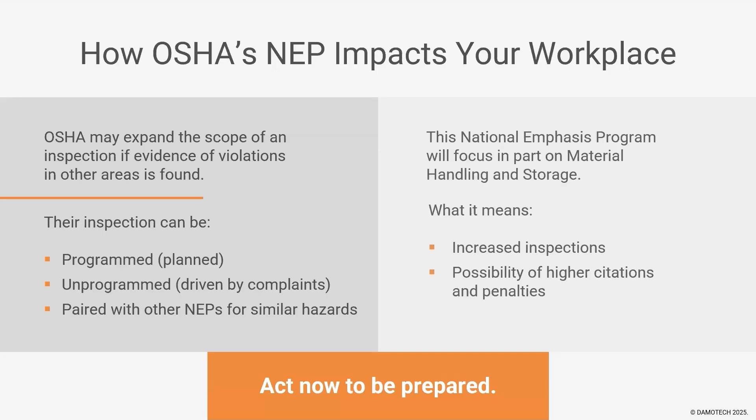Going back to the means of egress example, they would be able to take a look at your racking and look out for things that might not be in keeping with code, whether that's a lack of load capacities or damage to the racking, things we'll cover throughout today's presentation. The idea being we should look to act now and be prepared, because it's just a matter of time when OSHA is going to have to show up at one of our facilities.

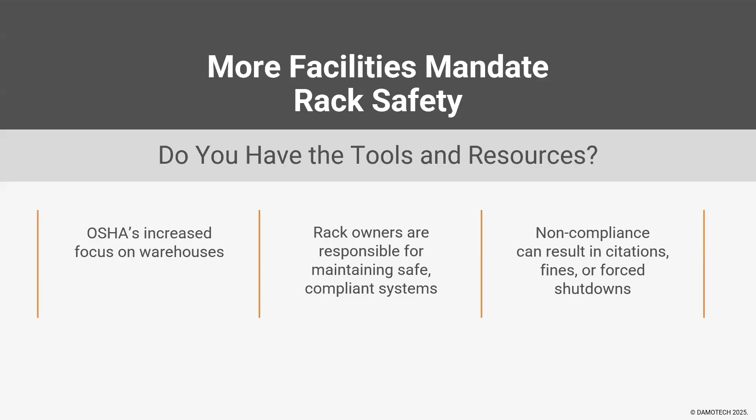So more and more facilities are mandating rack safety. In many instances, it's not just OSHA that's being the forcing function throughout the organization or the network. We want to make sure that as we make our way through this, you have the tools and resources to navigate through what those OSHA demands could be, and to the extent you have corporate policies or other forcing functions within your organizations that require an emphasis on racking, we'll make sure you're compliant so that you avoid not meeting your own guidelines, or that you're well prepared for the eventual OSHA visit.

So why does rack safety matter? Well, we're looking to protect employees, we're looking to protect the inventory and our operations. That's the fundamentals behind it. And there are real costs associated with rack safety. To the extent the racking is put out of service, there's downtime, there are certainly potential fines that could be levied, and there could be injuries or reputation damage if something really bad were to happen to the rack and cause injury or even potentially death.

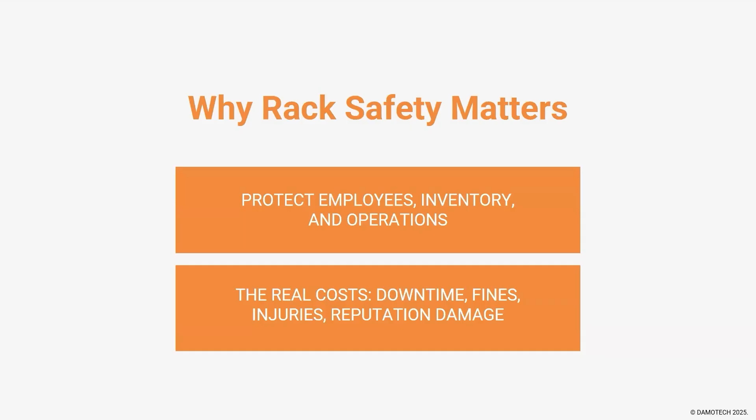So the five must-dos to reinforce warehouse safety. Let's kick things off with the first one.

Scheduling regular inspections. This is an important one, and it's one that we always lead off with, because having an inspection, whether self-performed or done by a third-party expert, gives you a baseline and a full understanding of what's going on with your racking.

Racks are highly efficient structures, components designed by engineers with decades in the industry, predominantly meant to support vertical loads. So to the extent a racking manufacturer can use 10 to 15% less steel yet still support the same weight, that's good for them, and good for you too, since everything is priced per pound and you'll pay less for that racking.

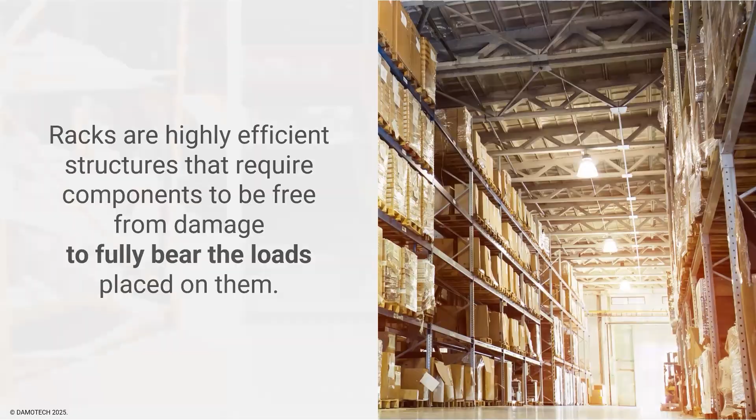The reason we're concerned about these kinds of damages is that if we don't act on those issues, we end up with what we see on the screen now. We don't put these up to scare folks, but when I present these webinars or in person to customers, there's inevitably a gasp looking at these images, because this is what happens if racking damage is ignored or if we're complacent about addressing the issues that could be present within the racking in the warehouse.

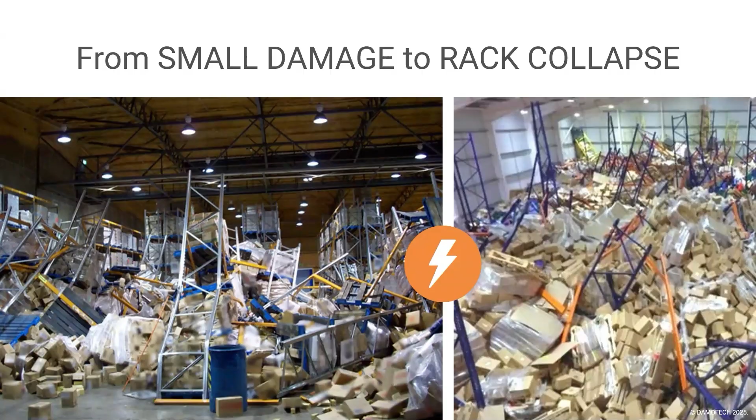So rack damage - I showed a couple examples there. Is a collapse imminent? How do we know if the damage our racking has sustained will lead to a collapse? We just don't know. We have enough experience to know the damage is significant, but I can't tell you whether after 10 years the racking will let go the next day, a week later, or two months later. It's awfully difficult to ascertain that.

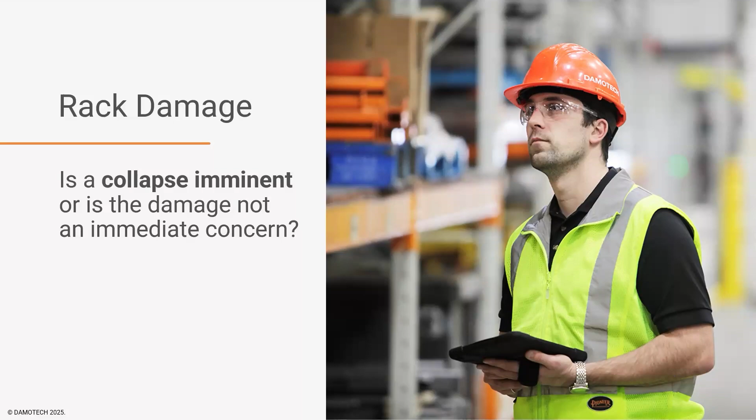That's why we take the conservative approach of saying no rack damage is good, and we should get ahead of it before something does happen.

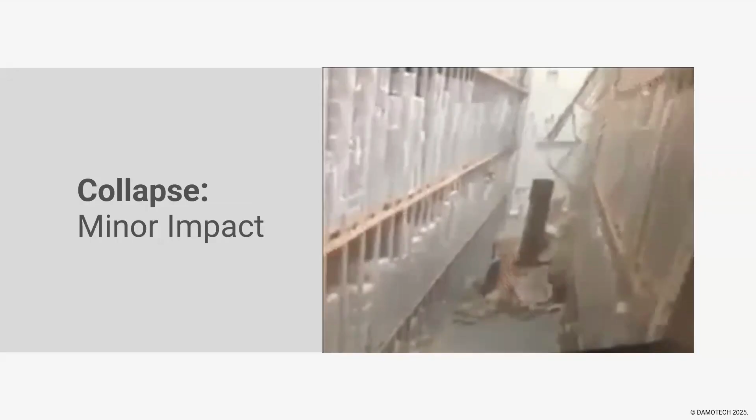And sometimes it doesn't have to be a big impact. Here's an instance where a minor impact barely brushed up against the upright, and because the upright had already sustained damage and was already weakened, that small tap of the forklift was enough to cause it all to come toppling down.

We're going to back-to-back situations with row spacers, we're doing top ties - all of that leads to the racking coming down section by section.

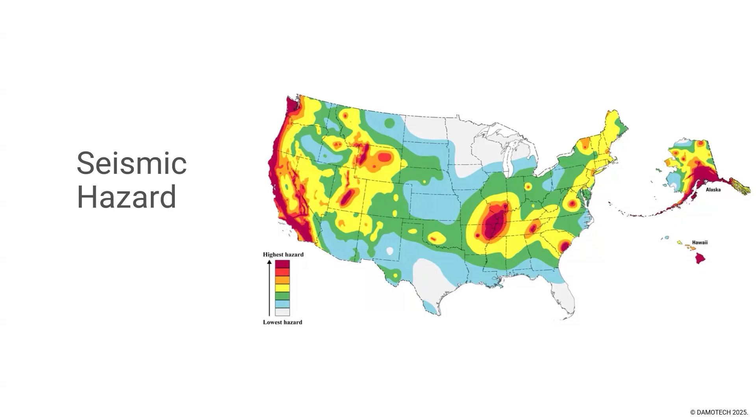So, kind of food for thought. We've inspected over the years, and this data is about 12 years old.

We've inspected north of 1 billion square feet of warehouse space, and in our experience, most warehouses will have 10% of their racking bays have some form of high priority issue, and up to half of these must be unloaded immediately. That's from data we've collected inspecting warehouses more than 3 years old, in some cases more than 20 years old, that have never been looked after. So if it's been a couple decades since someone has put eyeballs on the racking, most definitely you will have more than 10% of your racking have some form of high priority issue that should be looked after.

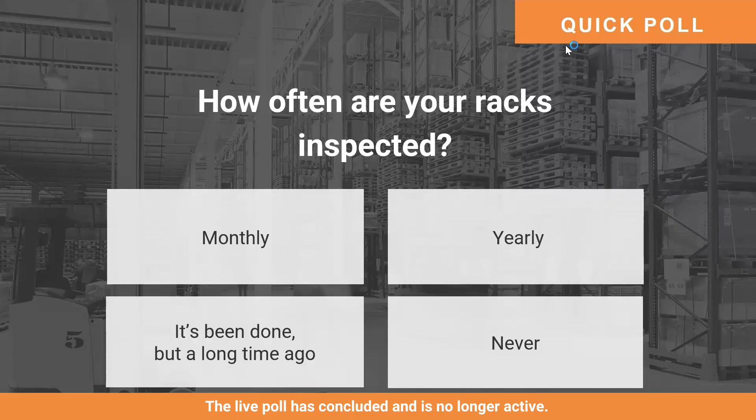So how often should racking be inspected? There's four choices: monthly, yearly, it's been done but a long time ago, and never. I'm going to launch a quick poll, and I'll ask everybody to take a few seconds to answer, and we'll talk about the results.

Again, how often should racks be inspected? So 76% of you answered that the rack should be inspected monthly, 15% of you said yearly, 9% of you said it's been done but a long time ago, and of course, good news, 0% of the attendees said never. So that was really great. Thank you for that.

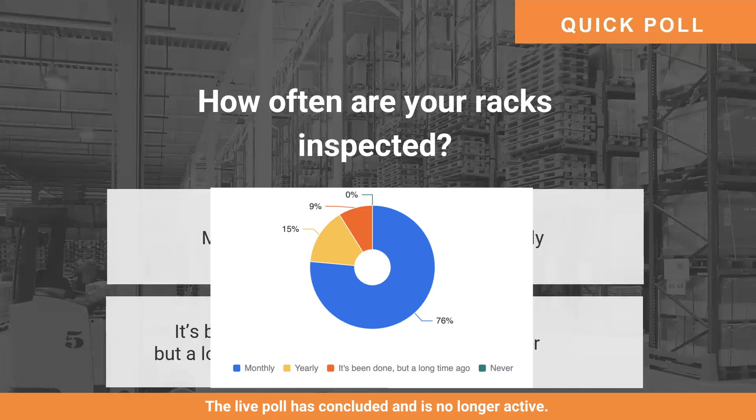Now, as we keep going, the answer to this is 'it depends,' which our chief engineer is very fond of saying when we ask him a question about engineering around racking. He says, 'What do you think, Charles?' I'll often answer with 'it depends,' and I would tell you that the frequency and who should be inspecting your rack will depend on the type of environment that you're working in.

Annual inspections are strongly encouraged by the industry. There's no code that'll stipulate the frequency, but there's always a general nudge towards saying you should have somebody with expertise, a third party, hopefully an engineering firm, that can come in and take a look at the racking on an annual basis just to make sure all the small things have been looked after.

Monthly inspections, and this is very common with many of the national accounts that we serve today. Those monthly inspections are being done by their own trained warehouse employees, or folks that maybe have gone through a Damotech training situation, or have been trained otherwise. But a monthly inspection by somebody at the facility level would be a great idea.

Weekly, certainly there's some areas of the warehouse which are more prone to damage. For example, your shipping and receiving areas where there's a lot of traffic and velocity going through, those might want to have a more frequent inspection. And there may be some areas like ends of aisles or certain freezer departments where you'll want a daily inspection. Maybe you have 50 or 100 bays of racking that you could quickly view to make sure there wasn't any significant impact that hadn't already been reported.

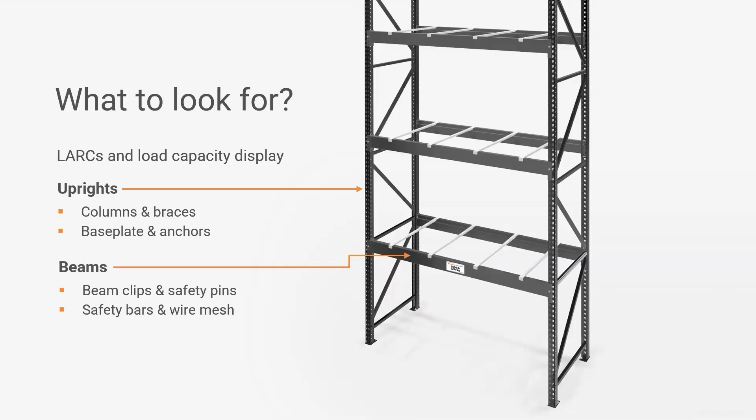Now, when to inspect. Here are five, I would say very common situations when we'll want to have somebody come in to inspect.

If there's incomplete documentation, if you don't have load capacity and LARCs for your racking—a load application and rack configuration drawing—you're required by the building code to have it. So that's a good time to call in an expert to assess what those capacities could be.

If you reconfigured the racking, if you've had a new installation of racking, maybe racking left over from another site that you're now going to add and expand for an existing warehouse, you'll want to have that inspected to make sure it's in keeping with what the code requires.

If there's been an accident, clearly, if you went through one of those situations we showed on the video, you'll want to have somebody come in.

And maybe you've been through a seismic event. We've been called upon more times than I can count after even a small seismic event in California to come in and put our eyes on the racking, to make sure the welds held, that the racking is still plumb, that it behaved the way it was supposed to throughout that seismic event. So if one of those takes place, you'll want an expert to come take a look.

Clearly, if you've had the unfortunate luck to have OSHA come in, you'll want to bring in an expert to partner with you to make sure you have what's needed to answer OSHA, put a plan together, and address the concerns they may have already highlighted.

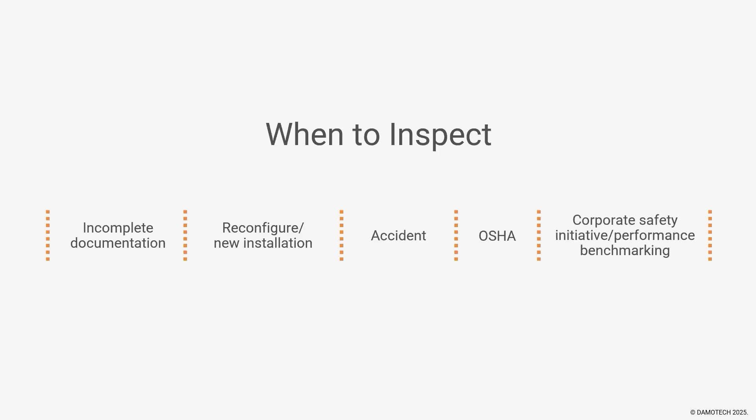We've talked about inspections quite a bit, and I think it goes without saying that inspection from the get-go, especially an annual one, is meant to be independent. It's meant to have somebody with no other desire but to impart their expert knowledge to ensure you're meeting code. So it's often called a third-party audit.

It's really meant to see if the racking, as it sits and stands there today, is conforming to the codes and standards. We happen to have trained engineers perform the inspections that we do, so we'd advise that's a recommended thing, but of course there are plenty of companies out there with trusted professionals that I'm sure can do a great job.

We happen to think that if you're going to bring an expert in once a year, it should be somebody with a lot of deep knowledge on the engineering of the rack, so they can address the issues they might find and keep the context of the situation in mind. Of course, you'll want a detailed report, with key findings and recommendations.

So the inspections that we do, or that a professional should be doing, involve a multitude of different elements. I think we do something like north of 45 or 50 different items as part of our overall checklist. So as we make our way through the slide, starting in the top left, we'll certainly look at damage to the upright.

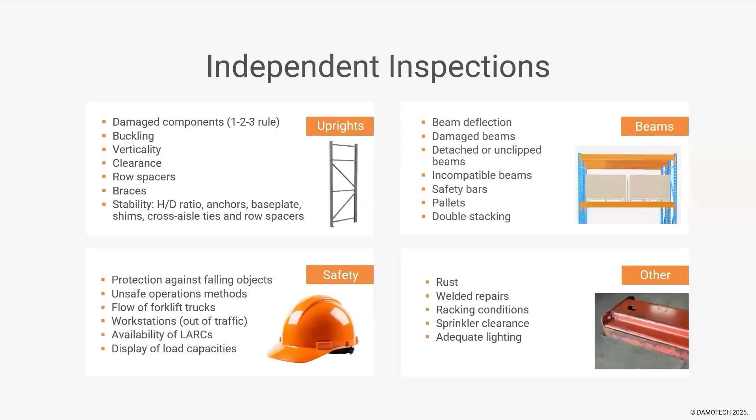And look, it just goes without saying, when you apply a significant amount of heat to a piece of metal, you're changing the metal components of it, the properties of the metal, so it will behave differently. So we would strongly advise to avoid performing welded repairs on your racking.

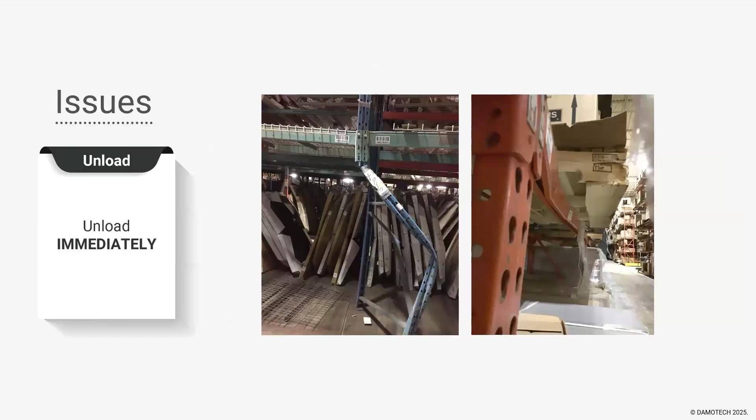So here's some examples of some unloads. I think no one's going to argue that these pictures should cause folks to be concerned. So you have a damage like the one in the first picture there, that blew upright - that is just crazy. And what's not obvious is that in many of these situations, these locations are still in service. In other words, they still have freight or pallets loaded on them, and that's not a good thing. These have to be cordoned off. You put safety tape on these things to make sure that no one is using these locations.

And the same with the next picture, that beam that was severely impacted. It's putting stress on the connectors. So you have a full pallet sitting there on top of it. Even though it's just a few feet off the ground, not a good thing. You don't want components damaged like that supporting any kind of weight whatsoever.

High, so these are instances where the welds were simply not in keeping with what we would expect as a standard. So these are areas where the areas were not prepped accordingly. The welds are clearly a little bit botched. This is where we would want to ensure these components are addressed right away.

If you look to the pictures on the right, you have a pinched column, that's just from people loading in the freight. And at some point, these cold formed or roll formed uprights, the gauge is so thin that you barely look at it and it gets deformed. So we're seeing some of that there.

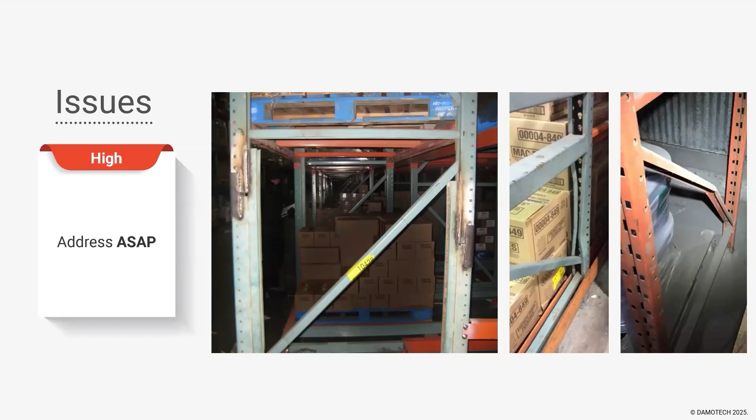Moderate: just some small, moderate deformations to the side of the upright. Maybe we're missing some anchors like in the middle picture, or missing a safety pin. Safety pins are required by code.

They're a good redundancy to ensure that should somebody operating a pallet or forklift inadvertently lift the pallet too high, which could cause the beam to dislodge, we want the safety pin to allow for that to catch and not allow for that beam to dislodge itself.

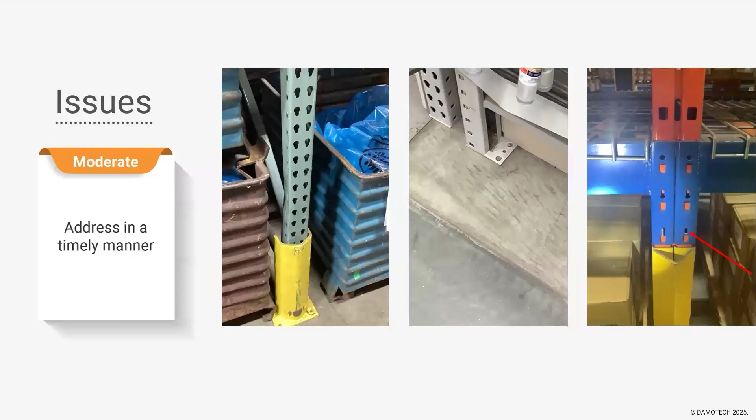What's also good to note is that several low or moderate issues can add up to something that's high. And only a trained professional will be able to tell you whether those issues are significant enough. Is there a slight twist to the upright? Is there a minor deformation to the brace? All those things, it's almost like paper cuts. After a certain amount of time, you add all these things up and they're weakening the overall system. A trained professional will be able to tell you whether those should be of concern or not.

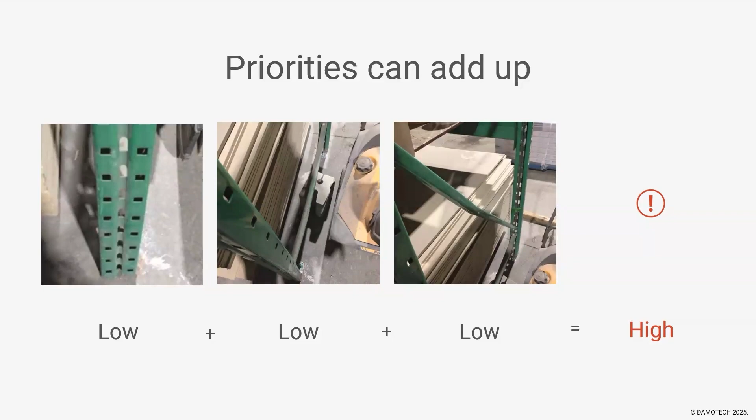Looking at upright columns, damage to braces, anything obvious going on with the beams. Are your uprights anchored in accordance with what the load capacity documentation says? Because in some cases your rack design may only call for one anchor and you're good to go, but you could be in a seismic environment where a minimum of 2 anchors is required, or 4 anchors is required. Whatever those engineering documents say is what you should be following.

Are there beam connectors in good condition? Are they still well seated? Are there any local repairs, the welded stuff that I showed you earlier? Do you have placards or labels for your load capacities? Is your racking plumb or not? Take a bubble level or torpedo level to see whether the racking is plumb in accordance with what the allowable standards are, and then start rating these.

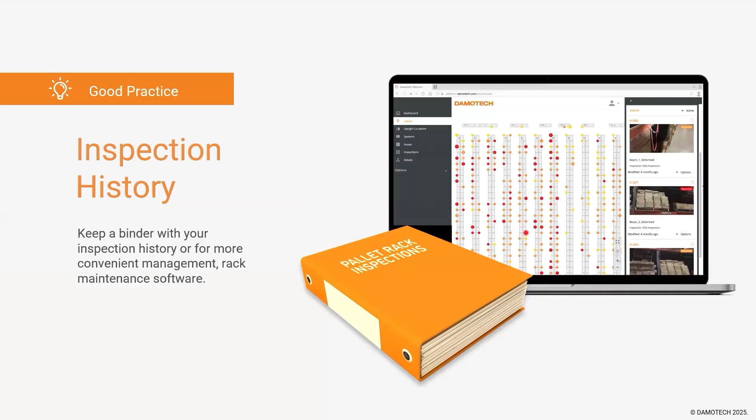In terms of next steps, make sure the experts you work with help you identify high priority issues, that you understand the level of risk, that recommendations come from experts, and that you avoid unnecessary downtime from having positions put out of service.

Must-do number two: take charge of safety with a solid action plan. Now that you've hired an expert to come in once a year, or maybe you're performing your own self-assessments monthly or more frequently, make sure whatever product or deliverable you get allows you to understand the critical things to go after. Not everybody has unlimited funds, so you'll want to spend those wisely but be timely in how you address the issues reported back to you.

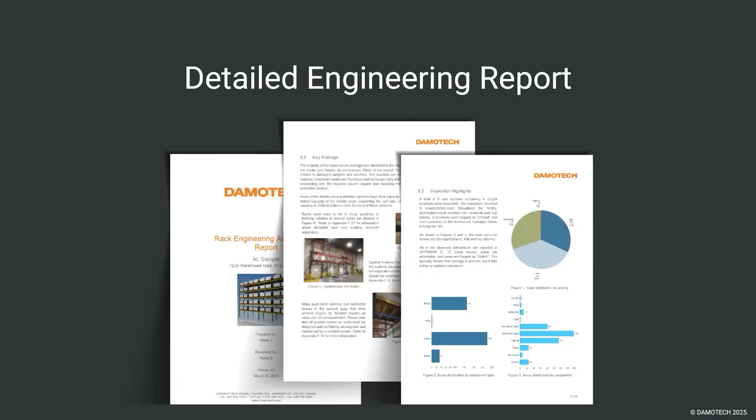As part of those findings, you'll want something very detailed. It should be stamped. Maybe you have Excel files that let you see the images that were loaded, or maybe, like us, you have an interactive layout built out for each inspection, accessible through a web-based platform.

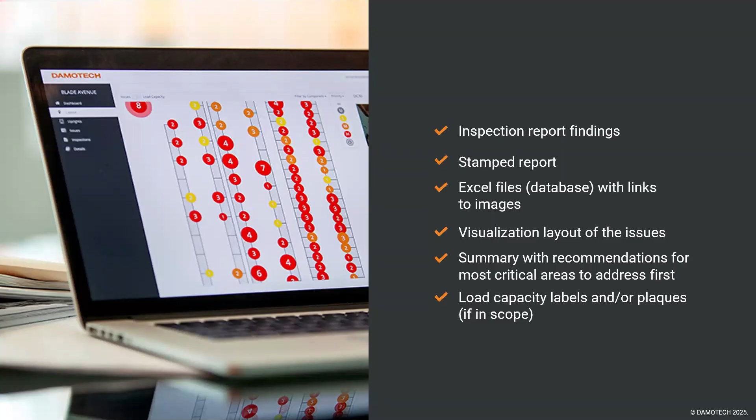That expert should be able to whittle down the vital few things you want to focus on first, to ensure critical areas are taken care of. And to the extent load capacity was part of the scope, you'll want to ensure you get that information as well.

We talked about priorities. At a very minimum, you should want to ensure you understand what to focus on, so all your issues should be prioritized so you can focus right away on the things that matter most.

We also want to be mindful that rack damage equates to unusable bays. If you're a big box store, or you have multiple DCs servicing the food and beverage industry, rack damage can be very significant.

If you're a 3PL renting out space to customer XYZ who's paying to store goods at your facility, and you've got 10% of your locations out of service, that's money that's just not flowing to you. All of this leads to not only unsafe conditions but a potential hit to the bottom line, so you'll want to develop a plan to fix critical issues ASAP.

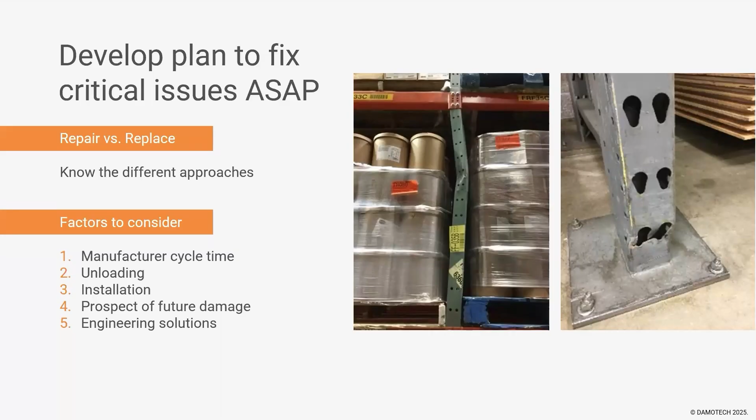Consider engineered solutions as well. If you're going to replace damaged components, they've got to be like-for-like.

If you've got bolted racking like we see in the picture, the blue racking there, you'll want to make sure that you're replacing those components like for like. Same gauge, same height, same dimensions, same everything. Not because you damaged a 96-inch beam that you could just take a 96-inch beam from your stock and slap it in. It's got to have the same gauge of steel, the same profile, height, depth, because they're just not going to behave the same way.

It's happened before where customers of ours, one in particular in the retail environment, having several retail stores throughout the US, they had a presence in Mexico and they repatriated a bunch of those uprights after those Mexican stores were closed. They thought the racking was the same. It looked to be the same, had the same dimensions, the same color, the same hole punch, only to realize that the racking's gauge was 30% less than what it was supposed to be.

So they started loading up those uprights with the same amount of weight, and lo and behold, one day, in the dead of night, the rack collapsed. It did that little S curve in the upright, and they wouldn't have known otherwise, but they thought they were safe with an upright that seemed to be the same, and it just wasn't.

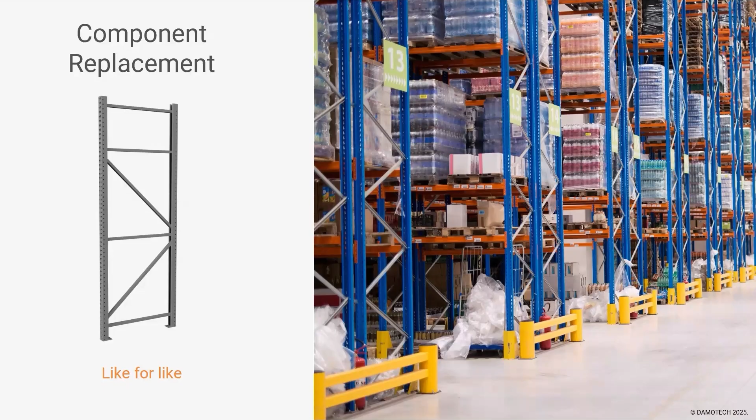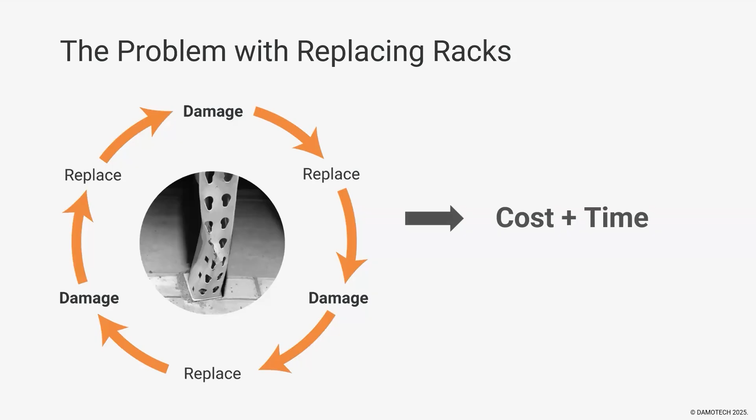So we want to make sure that we're like for like in every instance. I'm not saying that every component can be repaired, but think about it: once you damage an upright and you replace it because you're doing the right thing, it's just a matter of time before that same upright gets re-damaged again, and you're just going through this cycle over and over again, which costs time and costs money to perform this inevitable cycle that we're in when we start replacing damaged uprights time and time again.

Column repair, rack repair, as it's commonly known, is an interesting alternative, but you want to make sure that it does what it's supposed to: that you pick the right vendor that has an engineered solution that restores the load capacity of the location you're repairing, that it maintains the original configuration, that it's bolted as opposed to field welded or some other form of field prep, and of course that it minimizes the impact to operation. These are all things you should keep in mind as you pick a potential vendor to perform rack repair at your site.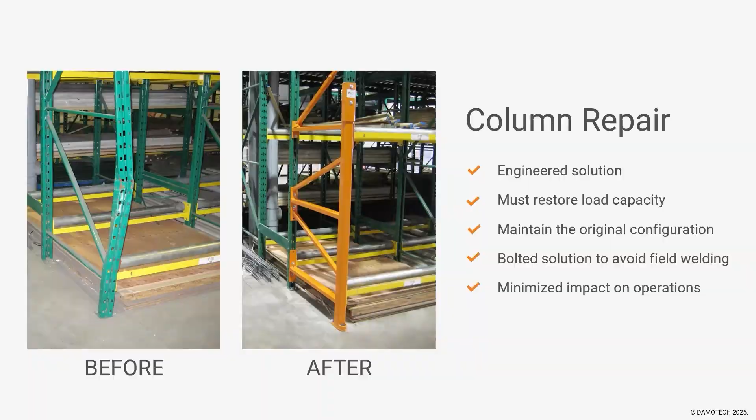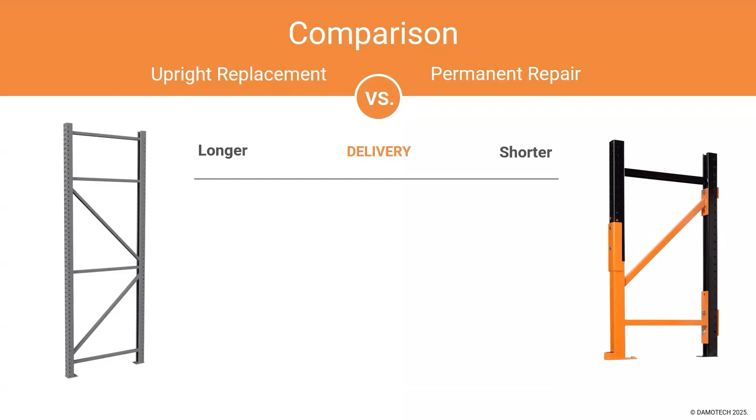A quick comparison between replacing an upright and repairing it with an engineered solution: on the rack repair side, at least at Damotech, you're in that 4-week time frame, and sometimes less, in terms of manufacturing cycle time. Compare that to an upright replacement—unless you have those in stock, or unless the OEM happens to have those in their yard, you're going to be several times multiple longer for the delivery of that.

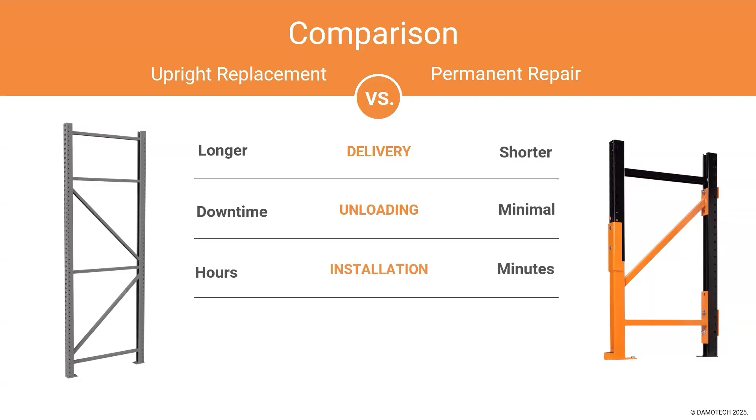Think about the situation I showed you a couple of slides ago, where you've got 5 beam levels. The amount of time to remove the freight, to unclip all the beams, swap out the upright, versus, if it's done the right way with the right engineered solution, you'll have a minimal unloading required for rack repair. Installation-wise, it's hours to swap out an upright, but it's minutes when it comes to rack repair. A 24-inch kit, which is the one you see on the far right side of the slide, takes anywhere between 20 to 30 minutes to repair. So think about how that impacts your operations and the pros and cons of both.

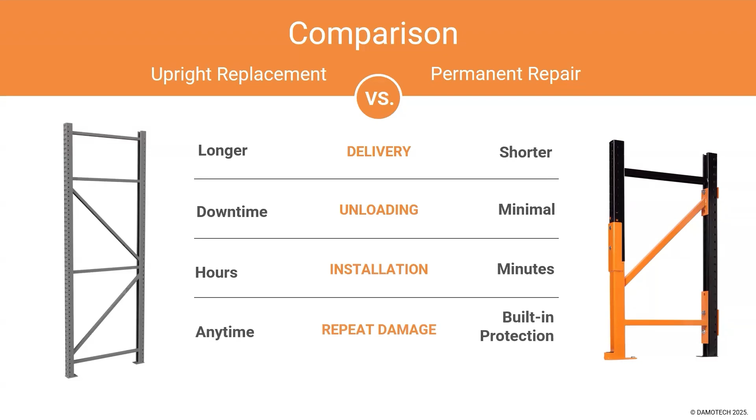And then finally, on the rack repair side, especially with the Pro line, which is the orange kit you see there, it has built-in protection—it's guaranteed for life against impact. Coming back to what I showed at the very beginning of the presentation, uprights are just not meant to be impacted. So it's a matter of time before those uprights get re-impacted and we get into that awful cycle we were talking about.

Now, if you had a competent inspector come in and perform an assessment for you, they'll want to talk about protection solutions, not from a vendor standpoint, but just from an overall perspective, saying, hey, by the way, we noticed a trend that certain parts of your systems were getting impacted on a frequent basis.

Maybe it was the ends of aisles, maybe it's certain tighter aisles, whatever the case may be, you'll want to ensure that you are made aware of the solutions that might be available to protect people, infrastructure, assets, and inventory. So protecting people, this has nothing to do with racking per se, at least on the first slide. If you have pedestrian traffic and walkways with heavy lifting equipment navigating close to these things, you'll want to make sure you protect folks so they're not at risk of being hurt by operating equipment.

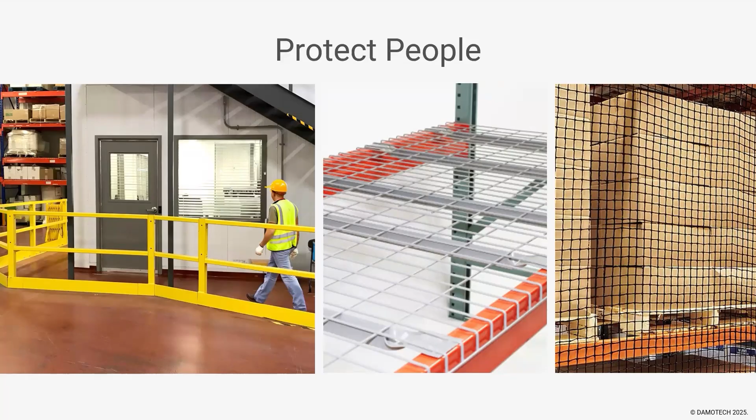If you're in a tunnel and you don't have wire mesh decking over the beams there, you won't want product to fall on people either walking under the tunnel or navigating through with equipment. So make sure you do put decking in the tunnel areas. And as I mentioned a few slides ago, if you have a section of racking where on one side you have pedestrian traffic, you'll want to put netting to make sure the product doesn't inadvertently fall and hurt somebody.

Again, not having a good day - that has to be assessed, has to be fixed, and then has to be signed off by a PE. So we're talking tens of thousands of dollars to effect a repair on something like that. Whereas you could have spent a few hundred, maybe $1,000 on the right protector and the right protection solution, and you wouldn't have to face that.

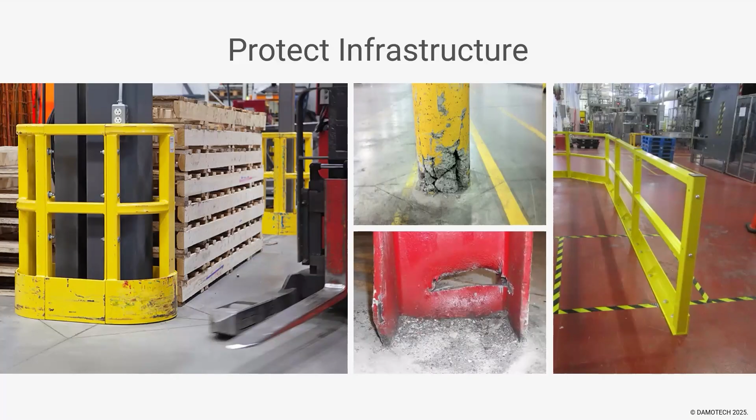Then, of course, if you have other infrastructure like machinery, you'll want to protect that as well, because millions of dollars go into some of these machines, whether it's bottling or other food service machinery. Those have to be protected adequately.

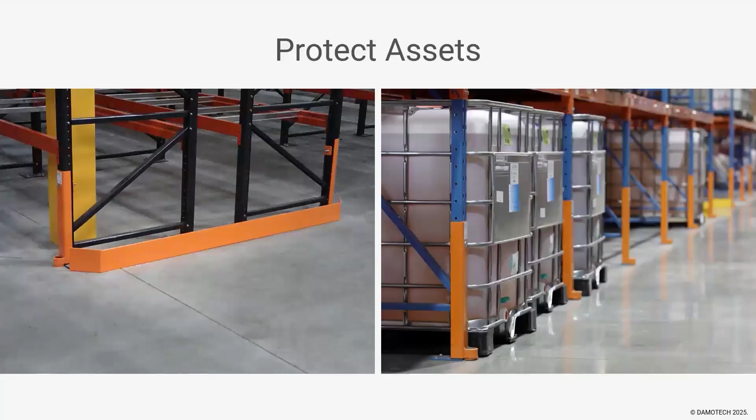And I would say, racking is an asset. It is not just a commodity. The sooner we start thinking about racking as being an asset that supports things that then get distributed, the sooner we'll start treating it like an asset and protecting it accordingly.

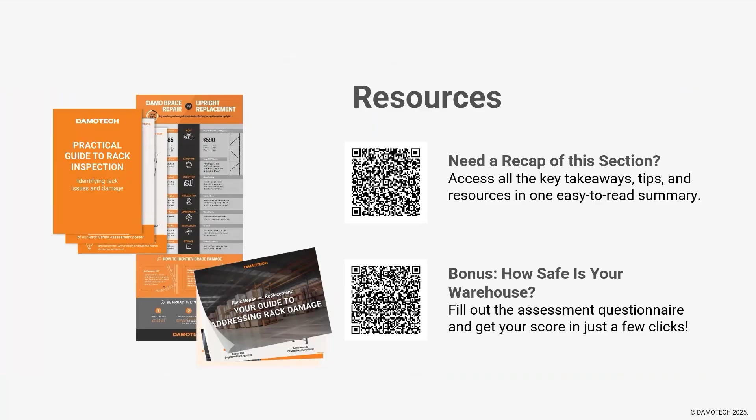So some resources that you're happy to QR code if you're looking to understand the practical guides to inspections and the like. These are things that you'll want to look at readily, and obviously we have tons of content on our website. So we're down to must-do number 3, which to me is one of the more important ones.

After you've taken a look at all the information from the inspection report and you have a list of issues that have been prioritized and you understand what to go after, how do you ensure that it's actually taking place? How do you ensure that you're really addressing these issues over time? The last thing you want is to have somebody come in on February 1st of a given year, and then fast forward 6 months and those issues are still present. So you'll want to ensure there's accountability and a way to monitor that progress.

Again, not to tout Damotech, but as part of our inspection and load capacity offering, we have a web-based portal where you could navigate through the issues that we find and be able to address those real time and check those off as the weeks and months progress.

So our dashboard, again, it's real time. It shows you the state of affairs with your racking, kind of a health check. It provides a heat map analysis of all the issues that were there, all color coded to ensure that it is very clear to those in charge and those acting on some of these issues what the priorities should be.

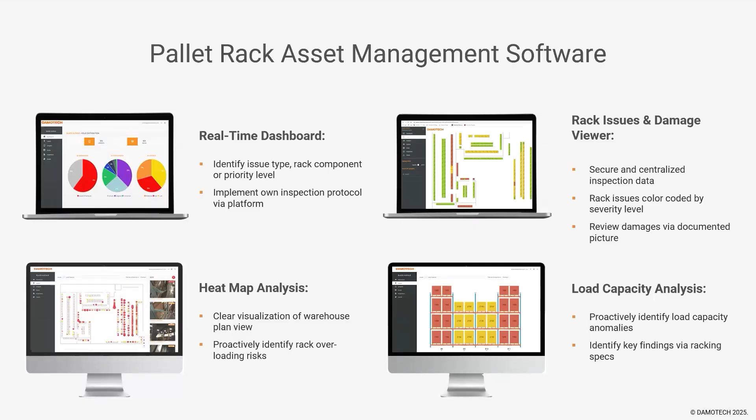And of course, for load capacity it's the same way. As part of our assessment, if we see load capacity levels that are under what we think they should be, we'll highlight those, so you'll be able to have a look and understand why there may be a concern with load capacities.

So as you track and report, what are you trying to track? Well, of course, making sure that you're staying on top of your load capacity. To the extent you've made a change to the beam levels, you'll want to ensure that you have a professional reassess that particular upright to make sure it's done correctly. Inspection reports, that those are logged, that all the issues, if there are modifications or repairs, that those are addressed and you're keeping track of those.

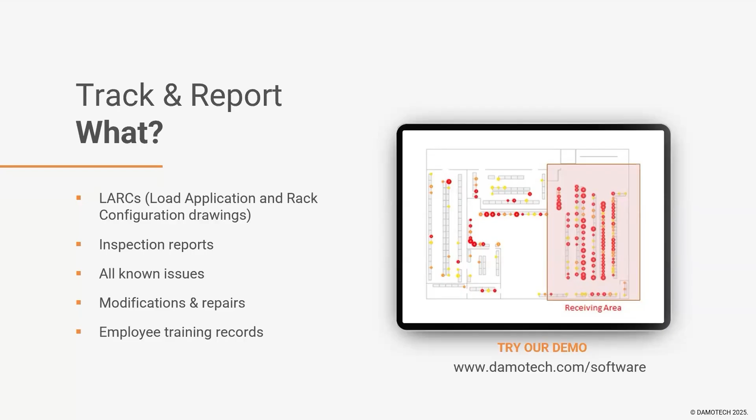And of course, to the extent that you have self-inspection training taking place, you'll be able to store all those things in our platform or elsewhere, but have access to those key documents. So again, very vital to ensure that as part of the effort you have a control mechanism in place to ensure that the issues identified are in fact being taken care of over time.

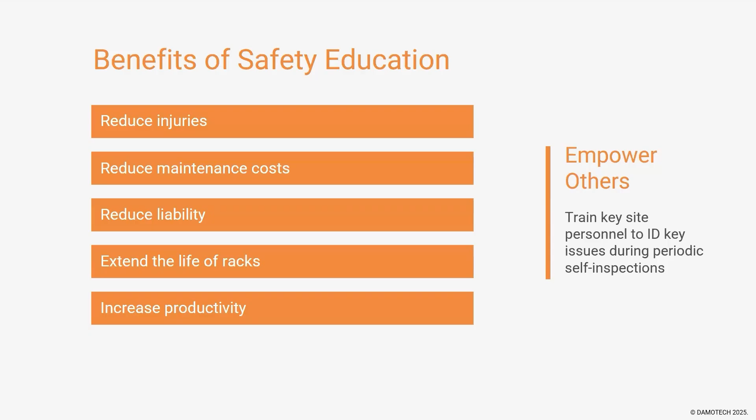So must do number 4, this is where we kind of ensure that everybody is invited to the party. So we want to train and empower the staff. The benefits of safety education are, first and foremost, we're reducing injuries. If people are made aware of the things to avoid, again, less likely to have issues down the road. It'll reduce maintenance costs because then we'll understand the impact of some of the damage that's taken place. We'll clearly reduce liability, extend the life of the racks because racks are not meant to be run into, and we're going to increase productivity because we're not going to have as many bays out of service. The key being empowering others.

Employee training should be very thoughtful. Being told to be safe is simply not enough. Better behavior comes with awareness of what the code says, what the regulations might say. Maybe it's corporate guidelines that people just aren't in tune with. The ability to recognize those risks, understanding the consequences of some of these things being ignored. Complacency is not the right behavior as we think about consequences and damage to racking, an unclipped beam, or a missing safety pin. Understanding the consequence of those particular high priority issues is an important step.

And of course, if people have a sense of ownership, we have best practices where they will assign a certain someone with their picture on the racking at the beginning of the aisle where you might have a load capacity display. They'll have that, hey, Joe is responsible for this section of racking. That way you have a sense of ownership and a sense that somebody's looking after those particular assets. Culture impacts safety, which is probably one of the greatest takeaways we could take from this.

Employee training, so who is it for? Ask me, it's got to be a top-down approach. We can't just have the worker bees on the warehouse floor be the only ones made aware of the importance of rack safety. Senior management has to understand, because oftentimes if there's money that has to be freed up to pay or hire more people, it's going to come from senior management. Managers at the middle level should also be made aware of these things so they could be the local presence to ensure things are running the way they're supposed to. Whether it's a safety manager, ops, or even maintenance, they have to understand the aspects of rack safety that could get people in trouble.

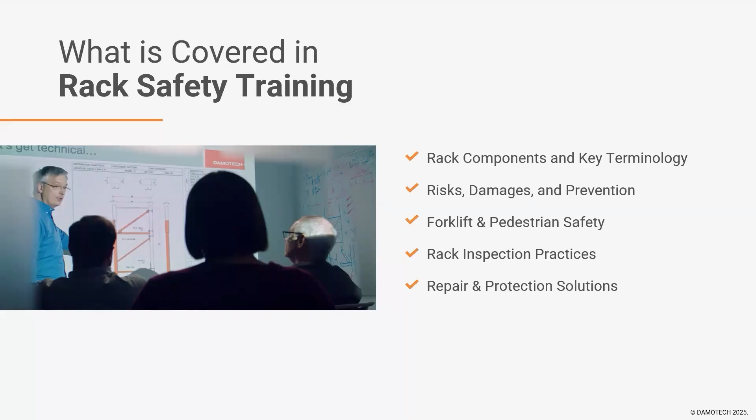And finally, I would advocate for forklift operators to be trained to some extent, so they understand that as they impact racking, there is a consequence, that this could lead to really bad things happening over time. So what kind of things are covered? We perform a lot of training with our customers: rack components and the key terminology, so we all start talking the same lingo and understand what components are and how they should be called out, the risks and damages, the prevention of these kind of things, forklift traffic, pedestrian safety, inspection best practices, and repair and protection solutions to address these things and maybe prevent them from happening to begin with.

Now, this is a video. I don't think the sound is going to come out, but hopefully it is.

This is why we work safe, right? When it all comes down to it, we're working for the brother or sister next to us. We're making sure that they get to go home at night, that they get to see their friends and families and their loved ones at the end of their shift. So put safety first always.

So we're rounding things out now. So must do number 5 as a conclusion.

If you think about all the things we've talked about in these 4 must do's, it's a lot to take in and navigate. So it's okay to seek help from a trusted expert, someone who can explain the racking design codes and whittle it down to the few important things. Whether in the USA or Canada, the codes are slightly different but based on the same fundamentals. You want an expert who can help you understand what applies to you.

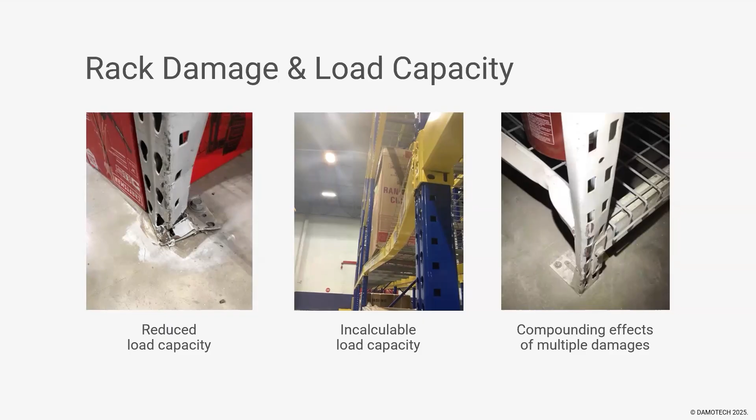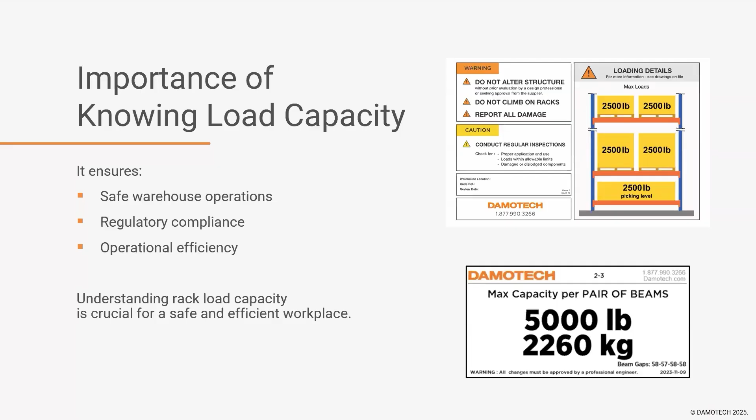You have to understand load capacity, and you have to be able to post it. The code says so—it's very binary, black and white. The building code says you have to have load capacities displayed, and they have to be accurate. That ensures safer warehouse operations, you're complying with regulations and codes, and of course you get operational efficiency because folks aren't wondering whether the rack can support a certain amount of weight or not.

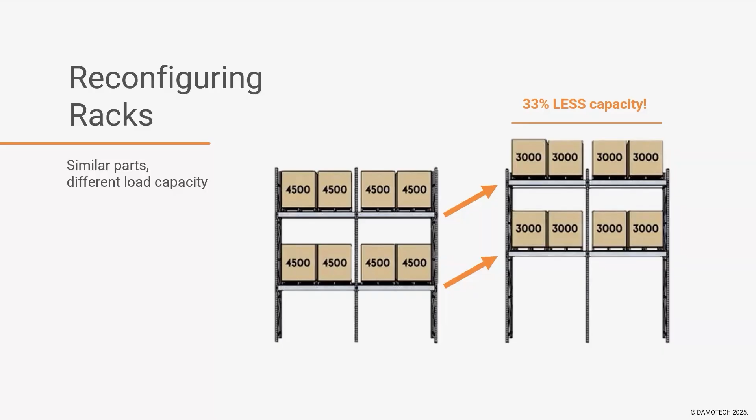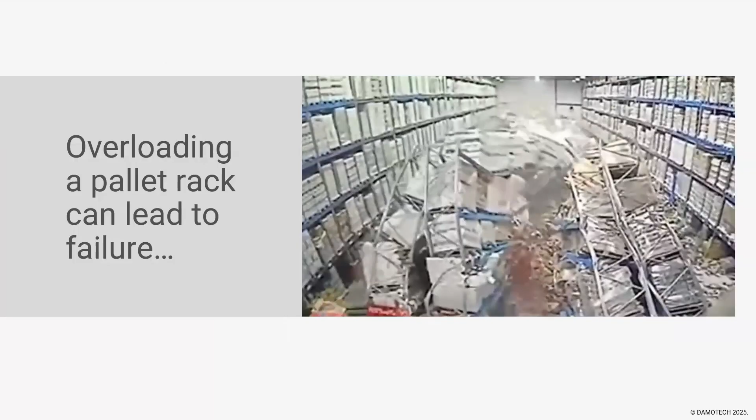Overloading racks can lead to failure. Here's an instance where we overloaded the rack, and of course we had a little bit of shaking going on—it did not behave the way it was supposed to. Again, it's difficult to watch, but certain small things can have very, very important consequences.

So why partner with a third-party expert? It's about having knowledge, expertise, understanding, and standardizing across multiple locations. You don't want one vendor to look at things in Florida differently than somebody working out of Oklahoma. Try to standardize this with a partner that can handle the geographic breadth of your operations—someone with streamlined processes, a deep bench of knowledge to answer tough questions, that can respond quickly to your needs, and that has compliance assurance to stand behind what they're putting out there.

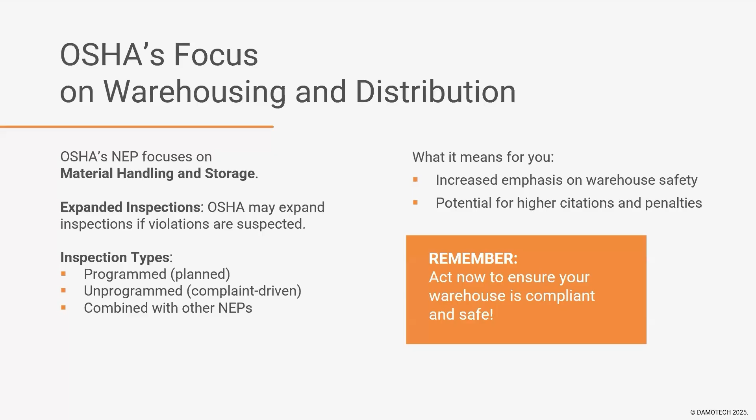Some of the best practices, let's recap them: conducting regular rack inspections, staying on top of safety with an action plan for critical items, tracking the closure, the safety, the performance items to make sure they actually get done, training and empowering your employees to understand when something bad is happening so they can call it out themselves, and of course, don't be shy about calling on experts and engineers to help you navigate through these tough things.

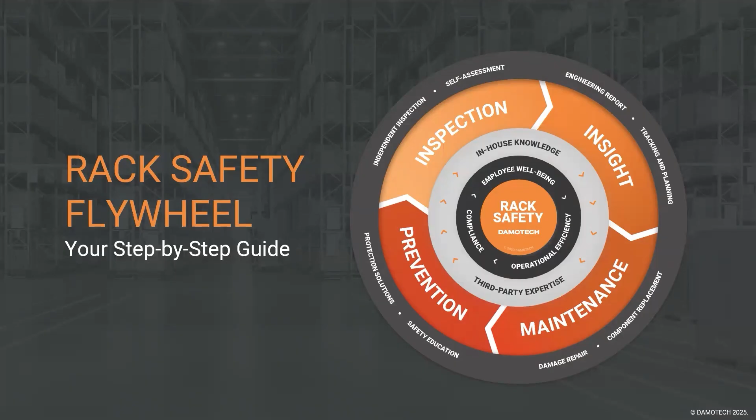We put together a flywheel that addresses this in a much more fulsome way. I'd encourage you all to go have a look at it—it goes above and beyond the 5 steps I just outlined today. Here's a QR code for all of the resources we have, and there's a QR code for the flywheel itself. It's a great tool and a great way to explain rack safety to management and folks still wondering how to best attack this kind of stuff.

So ultimately, closing comments—we're here to help. We've been around now for going on 36 years.

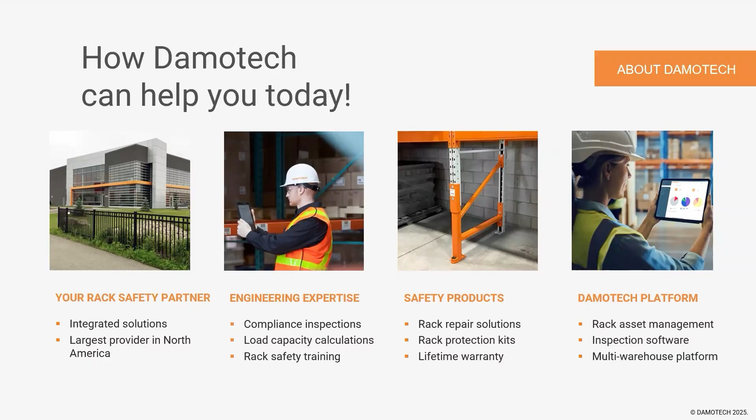We've been a trusted rack safety partner to a number of great companies. We have engineering expertise, a very deep bench of experts, safety products to help you address your concerns, and of course the noteworthy Damotech platform that helps you manage and look after your rack assets in a way that's intuitive and that can be shared across your network.

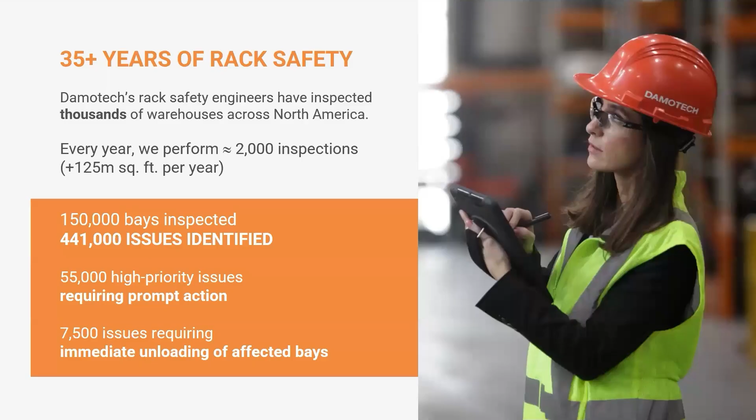With 35 years of rack safety experience, every year we perform north of 2,000 inspections, 125 million square feet per year. That's a huge amount of information, a huge amount of knowledge. We are experts in this field, and we're hoping that we could help some of you make your way through some of the difficulties that you may face.

So, if OSHA people ever come in and ask for documentation, what exactly do they want? What is it that they need typically? So I did answer, but I might ask you, do you have any points that you could add to this?

Yeah, absolutely. Look, I think, and we mentioned it a little bit before, load capacity documentation is probably the most important one, aside from having to be able to demonstrate that there's a plan in place for looking after the rack, whether it's that you hire a third party to come in on a regular basis, or they have their own self-inspection program. If you've been through a Damotech self-inspection training, you'll have certifications to attest to those attendees having been trained to perform self-inspections. So those are kind of things that, in my experience in talking with OSHA inspectors, that they like to see. Once they see that you're in control, that there's a comfort with your rack safety elements, they typically tend to walk the other direction and leave you alone.